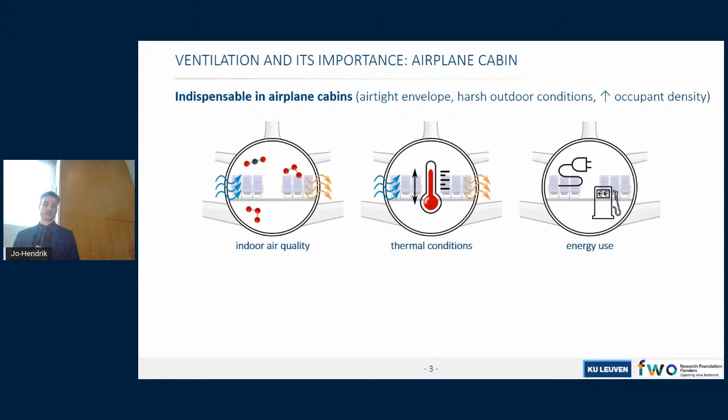To give an example, without ventilation, the comfort level of CO2 would be exceeded within minutes. And there is a case of disease transmission. It was in 1978, in which the airplane was on ground for several hours, and the ventilation system was not turned on. Just because there was one ill passenger, 72% of the other passengers were infected as well.

Another task of ventilation is to pressurize the cabin, because without ventilation, we weren't able to breathe in an airplane.

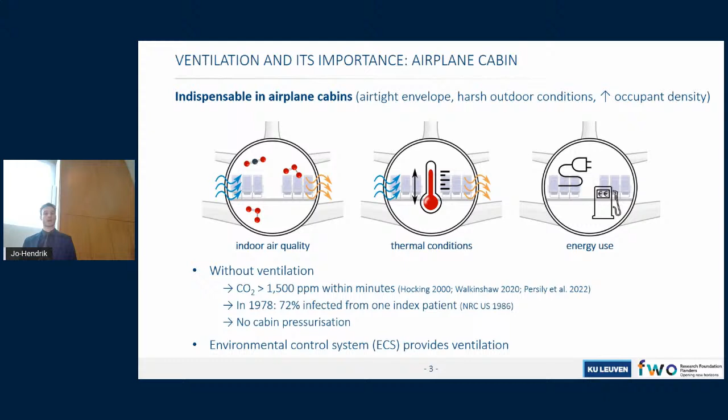The environmental control system, or the ECS, controls the supply air, which is the largest power consumer of the non-propulsive systems. Let's have a look how the ECS provides the ventilation air to the airplane cabin. I will be very brief here, so I will only explain very shortly the main working principle and only show a couple of subsystems of the ECS.

First there is the pneumatic system, which extracts the ventilation air. It's actually coming from the engines of the airplane cabin. There the air is already compressed. It's still at a high temperature, so eventually it will reach the air conditioning system, where air is cooled down to the temperature that is desired.

And then through a lot of subsystems, it will eventually reach the air distribution system. So then air is supplied, fresh ventilation air is supplied to the cabin.

The main ventilation method used in airplane cabins is called mixing ventilation. In mixing ventilation, fresh air is supplied above the passengers at a relatively high momentum in order to mix sufficiently with the cabin air. And as you can see, large recirculation cells are formed, which basically distribute the air throughout the cabin.

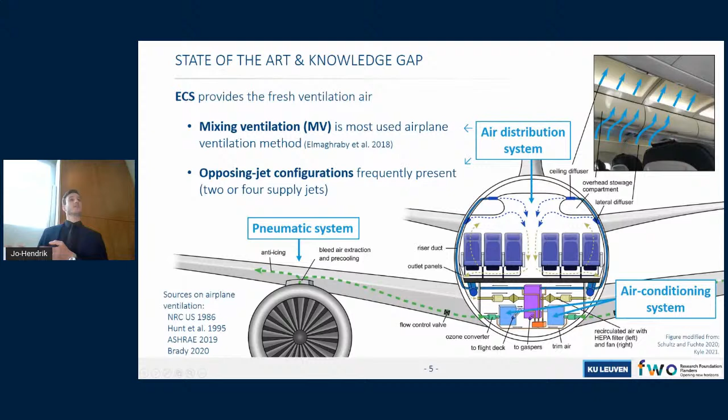An opposing jet configuration, as shown over here, with, for example, 2 ceiling jets or 2 lateral jets, is very often used for such a single aisle airplane cabin, and the cabin air is extracted at floor level.

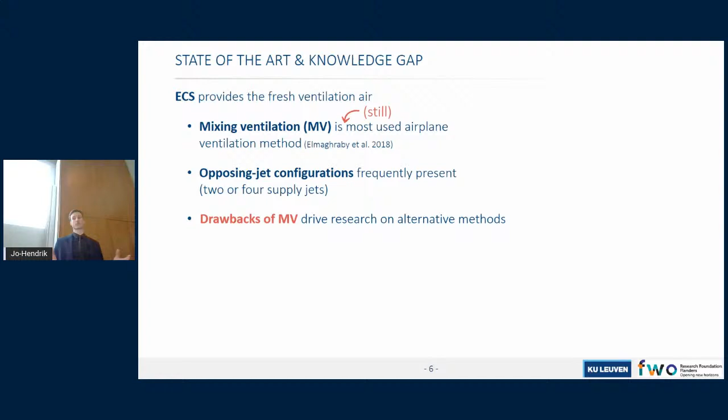There exist some drawbacks for this mixing ventilation method, which basically drives research on alternative methods. For example, displacement ventilation, as you see at the lower image. In displacement ventilation, air is supplied at a lower momentum below the seats, and it will eventually heat up, and it will displace the air towards the outlets that are located on the top. So it displaces the air, it doesn't mix.

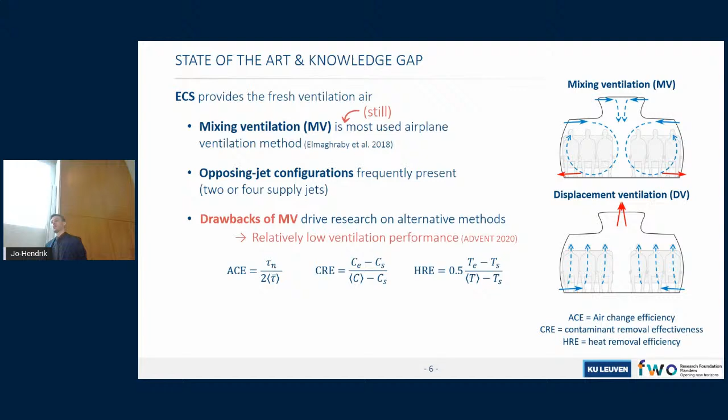So the mixing basically provides or gives a lower ventilation performance compared to, for example, displacement ventilation. And the ventilation performance can be expressed using these measures.

For example, on the left-hand side here, the air change efficiency, which basically measures the actual time needed to replace all the indoor air compared to the theoretical shortest possible time to replace all the indoor air. So it's a measure of how efficient the fresh supply air reaches every point in the cabin.

The contaminant removal effectiveness in the middle is concerned with the dilution of contaminants and the extraction of contaminants, and heat removal effectiveness on the right-hand side is the same as contaminant removal effectiveness, but concerns the heat instead of contaminants.

Other drawbacks are, for example, stagnant zones that can be present, for example in the center of the large recirculation cells. In stagnant zones, contaminants can build up, so this is undesired. Short circuiting could also occur, which means the fresh supply is directly going to the outlet flow.

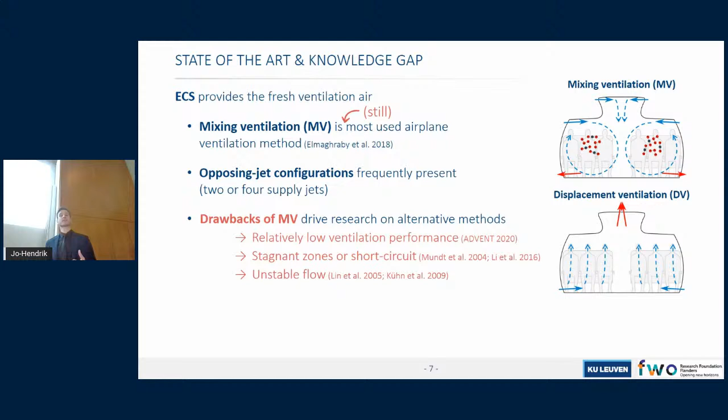Such a mixing ventilation flow could also show some unstable flow behavior, which is also undesired. So ideally, you would like to control the flow field as much as possible.

However, such alternative ventilation methods as displacement ventilation also have their deficiencies. For example, they experience difficulties with implementation related to high costs, interior design restrictions. And with deficiencies, I mean displacement ventilation cannot be used for heating the cabin, or it performs very bad for heating.

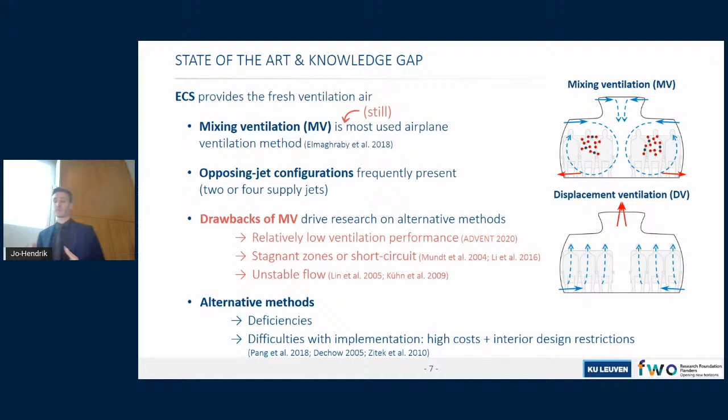Since mixing ventilation is still the most used airplane ventilation method, and airplane manufacturers still tend to use this method because of its robust design and easy implementation, the question of how to improve this mixing ventilation performance is still very relevant.

The mixing ventilation performance basically depends on the induced ventilation flow patterns and the underlying flow components, which are driven by the supply jets. By fundamental flow components, I mean the supply jets, their interaction into a merged jet, these recirculation cells, but also thermal buoyancy, the thermal buoyancy plumes rising above the passengers.

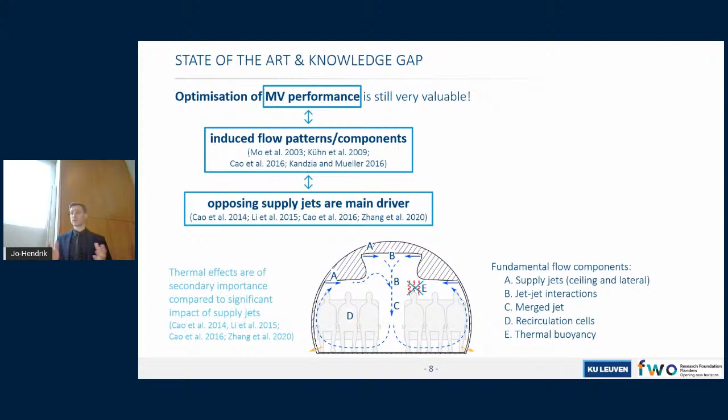I would like to mention that thermal buoyancy effects are considered to be of secondary importance given the primary influence of the supply jets, which really mainly drive the flow field. Therefore, in my thesis, I only focus on isothermal conditions. I did not consider thermal effects.

We would like to improve the mixing ventilation performance, and therefore there is a need to obtain a detailed investigation of all these flow patterns and the underlying flow components. And of course, we need to think about novel mixing ventilation concepts that may improve its performance. However, current literature fails to address these needs.

The fundamental flow components are only scarcely investigated in current literature. There exist some airplane cabin studies, for example the one shown here. These researchers used a cabin mock-up, a laboratory setup, and indeed investigated the airflow patterns as indicated, like the lateral supply jets, their interaction, and the recirculation cell.

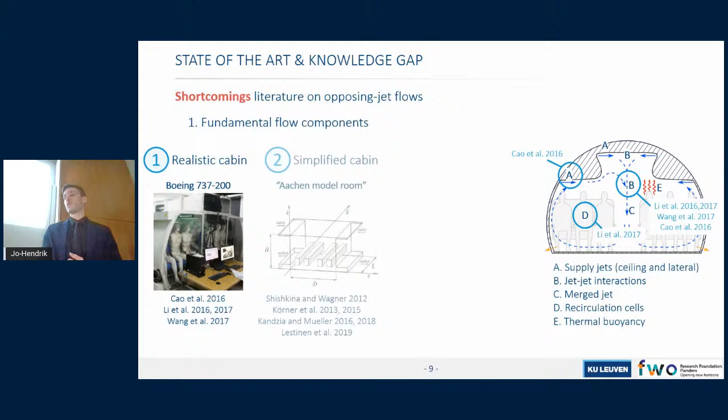However, since they used a realistic mock-up with a lot of details, these results could be case specific. So there might be a need to construct a more simplified model, such as the Aachen model shown here, where you have two opposing wall jets at the top.

These researchers did not investigate in detail the underlying flow patterns. They mainly gave a description of the overall velocity field and temperature field, without going into detail on the fundamental flow component characteristics. Such a detailed characterization has been performed in even more fundamental studies.

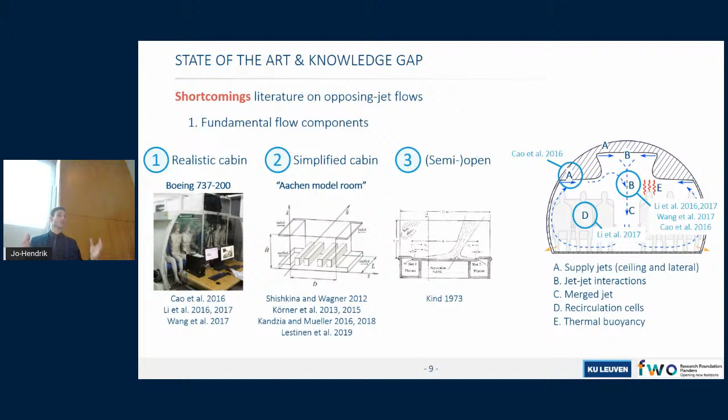However, these studies use an open environment, while an airplane cabin is definitely an enclosed environment, so you have return flows that can have a very large impact. So basically, this defines my first objective. We designed a generic experimental setup consisting of a simplified cabin model in order to study such opposing jet configurations, but also the underlying flow components.

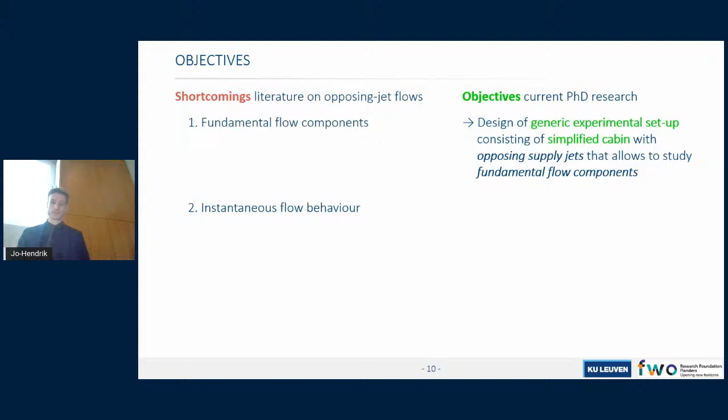The literature also mainly describes the mean flow behavior. The instantaneous flow behavior is rarely described. So this defines my second objective of the thesis: I analyzed both the mean and the instantaneous flow behavior of such an opposing jet flow.

Mainly steady simulations, so time-independent simulations, have been used in the literature. Therefore, I performed steady but also transient CFD simulations. Novel mixing ventilation concepts are missing because researchers tend to investigate alternative ventilation methods instead. This is why I investigated time periodic ventilation, as I will explain later, as a novel mixing ventilation concept.

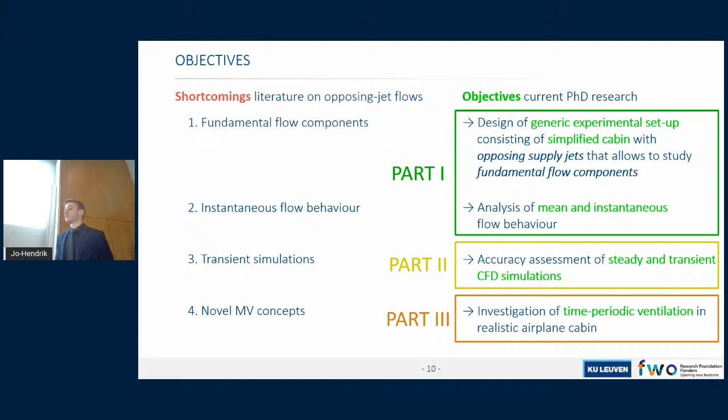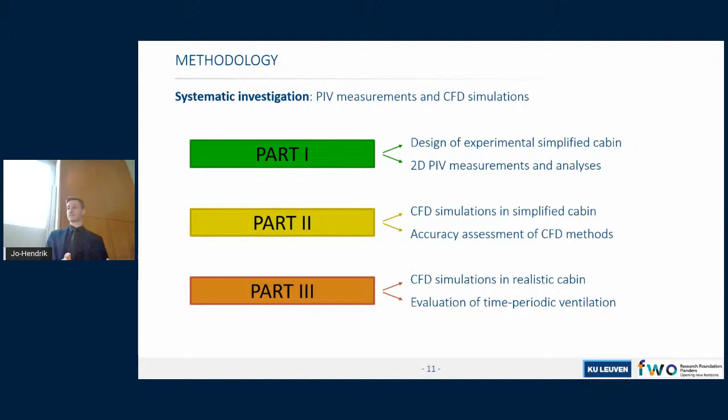The three parts of the thesis consider each of these objectives. Here you see an overview of the thesis. I performed a systematic investigation, consisting of both measurements and CFD simulations. Let's focus on part one.

Its width is 30 centimeters, the height is 20 centimeters, but the width to height ratio is the same as used in airplane cabins. It's water-filled because it's reduced scale. As you probably also noticed, it's an empty enclosure, so no seats and no passengers are incorporated, so it's isothermal as mentioned.

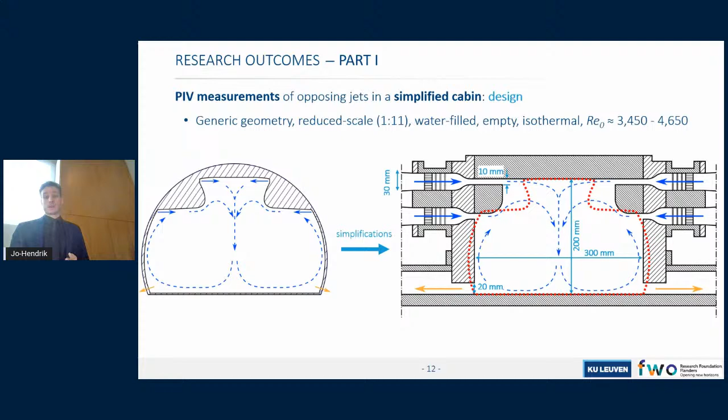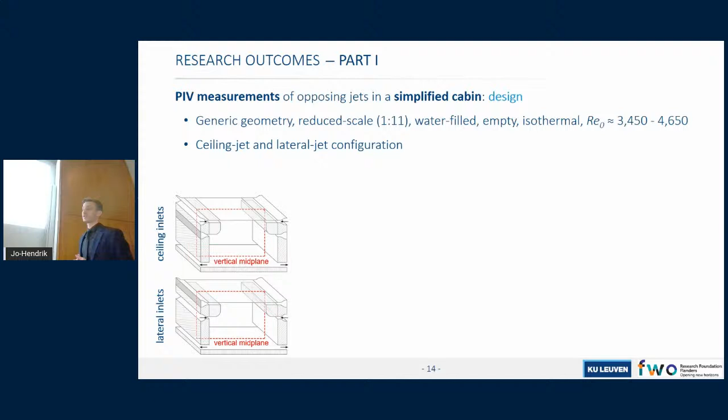I investigated two opposing jet configurations: a ceiling jet configuration with the ceiling inlets open, and a lateral jet configuration with only the lateral inlets open.

Particle image velocimetry, or PIV, measurements have been applied. Important to mention is that the laser light illuminates the vertical midplane. This was the measurement plane, so I measured the flow field in the vertical midplane of this setup.

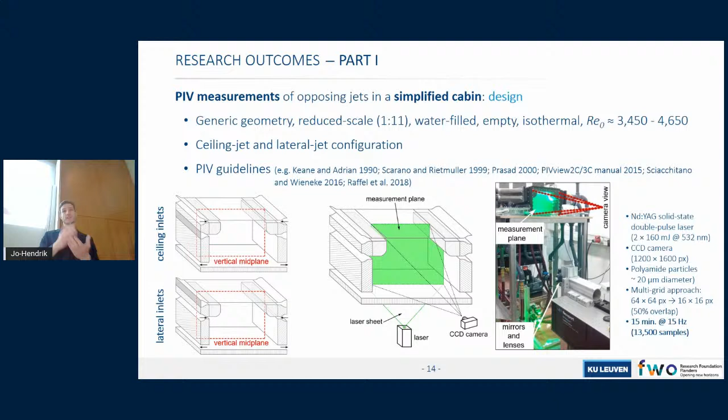Each measurement was taken for 15 minutes at a sampling frequency of 15 Hertz, so I collected 13,500 instantaneous snapshots of the flow field. In total, I performed 6 measurements, 3 in each opposing jet configuration.

I would like to mention that although I tried to carefully match the inlet conditions of the opposing jets, there's still a slight deviation, for example in the Reynolds number or in the turbulence intensities. You should keep this in mind for a moment.

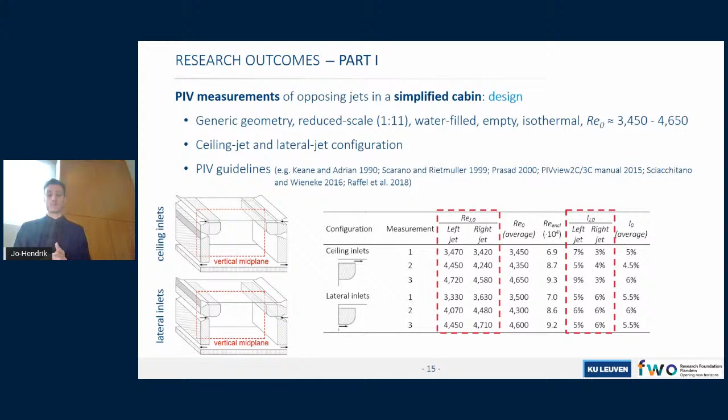Now let's show the results in both configurations. First, the configuration with opposing ceiling jets. I will show the instantaneous flow field followed by the mean flow. So this is how the flow field looks like.

You can clearly see both ceiling jets coming from the ceiling inlets. They interact around the vertical center line of the enclosure, showing a transient interaction zone shifting from left to right across this vertical center line. This interaction zone drives the merged jet, which appears to flap from left to right.

Some specific observations for one of the 3 measurements: as opposed to the other 2 measurements, this one showed stronger deviations of the merged jet location from the vertical center line. This is shown in this figure.

On the vertical axis, you see the location of the merged jet as a function of time. The green curve, which belongs to the measurement I'm talking about, shows some deviating positions, meaning that the merged jet is located for 20 up to 60 seconds closer to one of the 2 inlets. At such instances, the flow field can even become unstable, as you can see here.

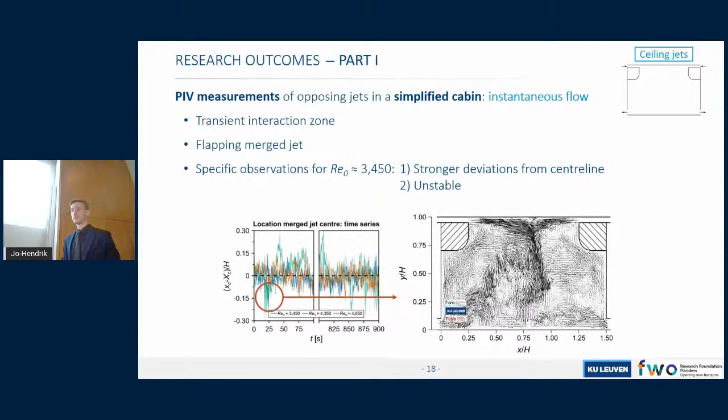This clearly shows some unstable behavior, which could be due to the fact that in this measurement the inlet conditions were a bit more balanced. Compared to the other measurements, there was a larger difference in supply velocities, for example, which could mean that one of these jets is suppressing the opposing jet more, giving a more stable configuration.

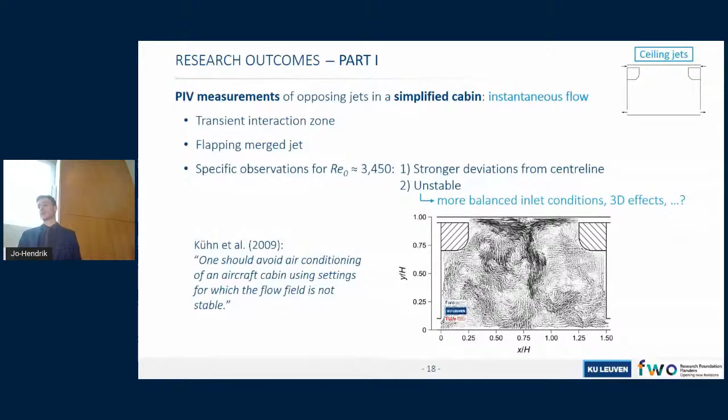Also, 3D effects could be present, but this I didn't test, because I performed 2D PIV measurements in one plane only. As already stated in the literature, one should avoid air conditioning of an aircraft cabin using settings for which the flow field is not stable.

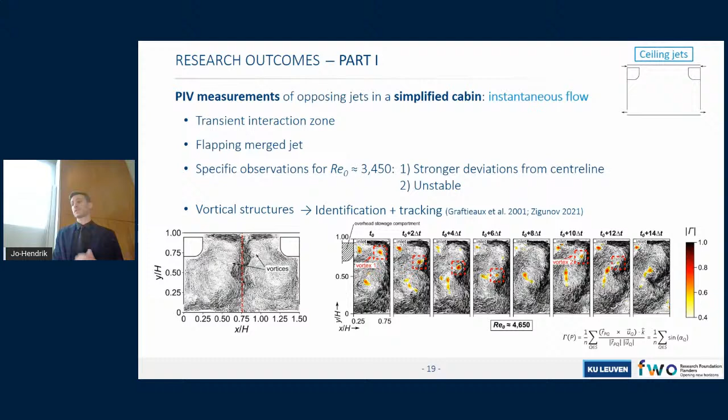Then by inspection of the flow field, I observed a lot of vortices, so I tried to visualize and track them over time. What's important to mention is that such vortices, or in Dutch 'wervels', can be advected along with the flow, along the merged jet. You can clearly see that high momentum fluid from within the core of the merged jet is transported to the sides, so such vortices really contribute to the mixing in the enclosure.

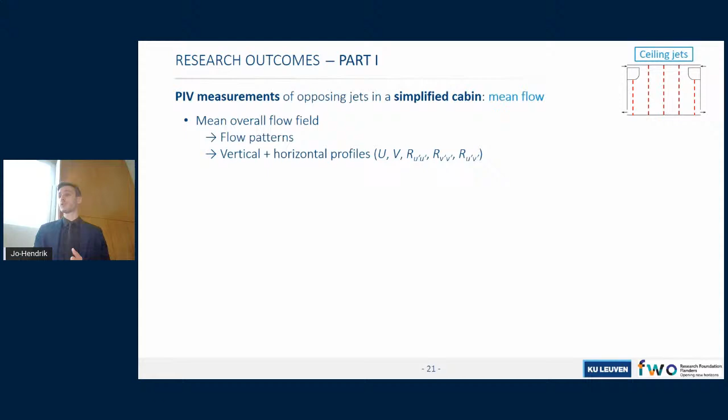Then I inspected vertical profiles and horizontal profiles, which I will briefly show: the vertical and horizontal profiles of the velocity components, and also of the Reynolds normal stresses and Reynolds shear stresses. These Reynolds stresses represent the velocity fluctuations, which are related to turbulence levels, if you want.

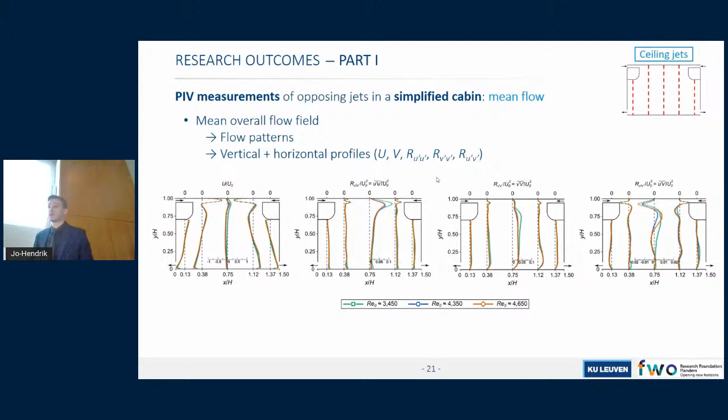We analyzed the vertical profiles as mentioned, so we could clearly see from this image, which represents the vertical velocity over the height, it clearly shows the development of the merged jet, which also becomes wider because of the mixing at its sides due to these vortices I've shown.

In the interaction zone, high turbulence levels are present, indicating that this is really like a transient, it's really shifting back and forth along the center line. Also, high turbulence levels are present along the sides of the merged jet.

Besides the overall flow field, I also investigated the individual flow components. So for each flow component, I derived several characteristics. What I would like to show here is that indeed in mixing ventilation, stagnation zones can be present. And in case contaminants would be present inside my experimental setup, they might build up in such areas, which is of course unwanted.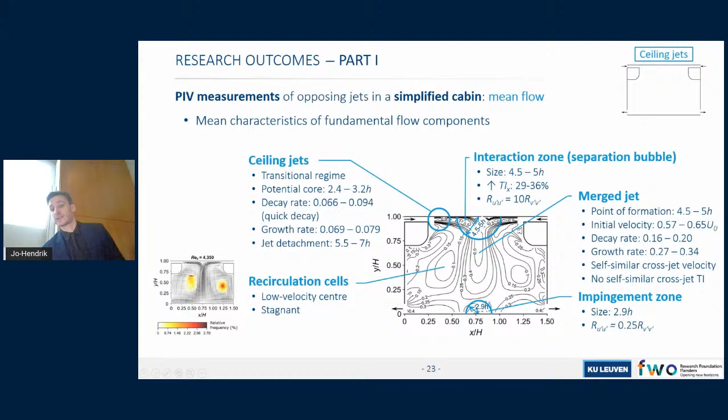Let's have a brief look at the lateral inlet configuration. I will only give a brief outline of the results here. I showed the results of the ceiling inlets in more detail because I will use these measurement results in part 2 later. So the instantaneous flow looks like this.

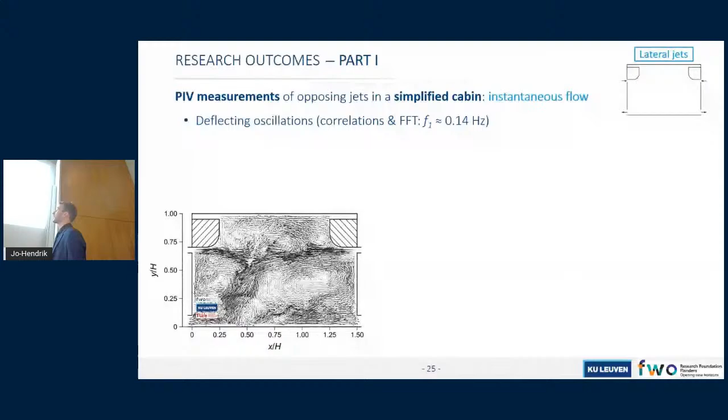We can see deflecting oscillations with a specific frequency, which is also similar to airplane cabins. Besides the deflecting oscillations, some horizontal oscillations with higher frequency were observed. This is basically the situation in between these deflecting oscillations when both jets really try to displace each other.

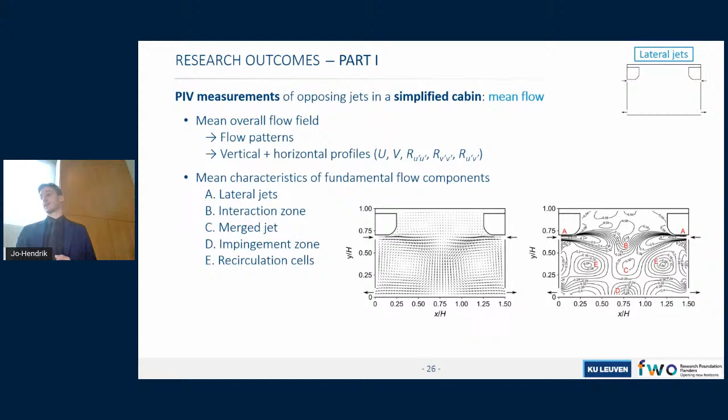Vortical structures were again investigated. Then some results of the mean flow. So again, I investigated the overall flow field in terms of the flow patterns. Vertical and horizontal profiles were observed. And again, a characterization of each of these flow components was made.

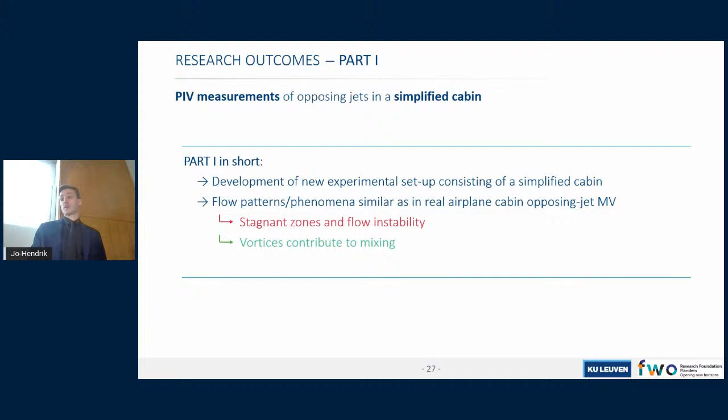So part 1, in short, I developed a new experimental setup that consists of a simplified cabin mockup. And this cabin mockup really shows flow patterns or phenomena similar to opposing jet mixing ventilation. It showed indeed some stagnant zones and flow instabilities, but also vortices that can contribute to the mixing.

This brings me to the second part of my thesis, in which I performed CFD simulations in this simplified cabin, and I tried to assess the accuracy of several CFD methods using the measurements presented in part 1.

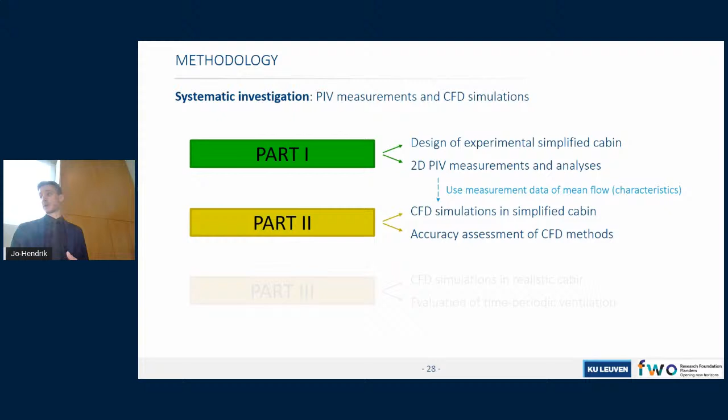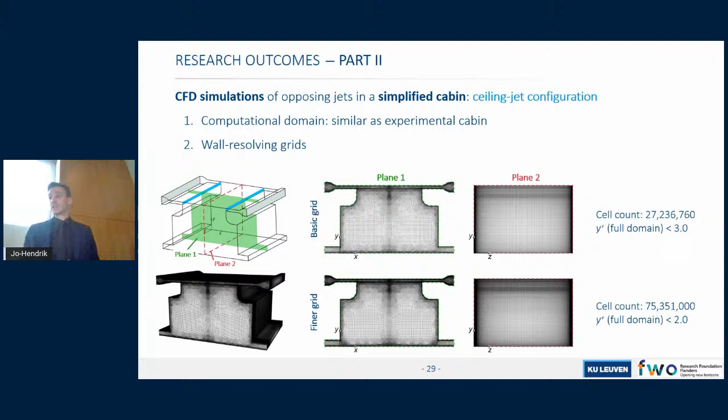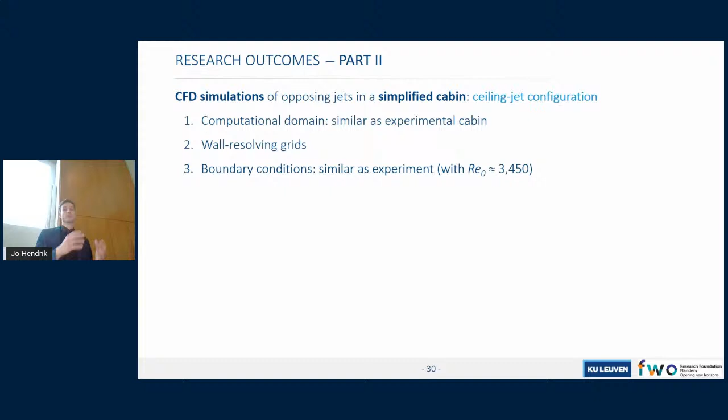The boundary conditions are taken equal to those in the experiment. However, I should mention that because in the experiment the inlet conditions differed a bit between the two jets, I took the average value, and this average value has been used for the inlet conditions of both jets in the simulations. We choose the correct computational settings, then the turbulence modeling.

So I tested two different turbulence models, RANS and LES, which I will show you on the next slide. I use this drawing of Leonardo da Vinci, in which you can see a water stream flowing into a pool, creating a turbulent flow consisting of many different vortices, ranging from larger scale vortices all the way down to smaller scale vortices.

In RANS, none of these vortices, or none of their energy, the turbulent kinetic energy as we call it, is actually resolved. Only the mean flow is resolved, and all the turbulent kinetic energy is modeled. While in LES, which is also called the scale resolving method, a large part of the turbulent kinetic energy spectrum is resolved, and only the smaller scale eddies are modeled.

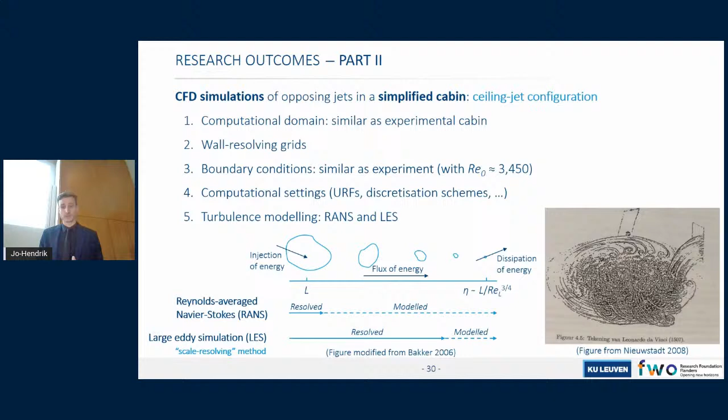To give you an idea about how such a flow field looks, in RANS you can see this is the mean flow behavior. In LES, this is an instant of an LES simulation. So LES is time-dependent, providing a time-dependent flow field. You can also clearly see there are more details inside the cabin. So in order to compare the LES simulations with RANS, we need to time average the results.

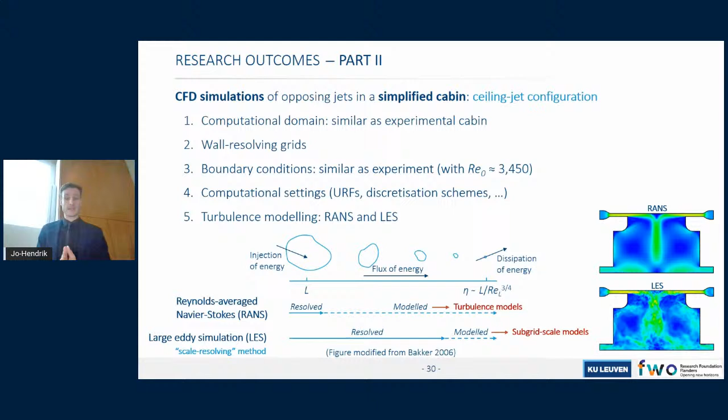The modeling part is controlled by either turbulence models in RANS or by subgrid scale models in LES. I tested 3 different RANS models and 2 LES models. For the RANS models, I tested 2 K-epsilon models, the RNG and the low Reynolds number model, and 1 K-omega model, the SST K-omega model. The LES subgrid scale models are the WALE and the dynamic kinetic energy model. So I performed 5 simulations in total.

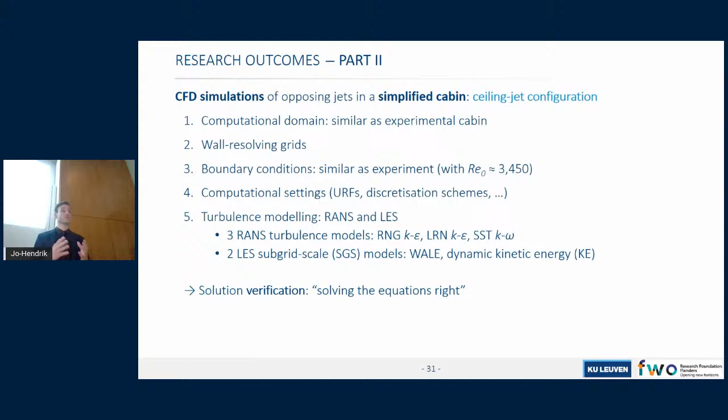The first thing we need to do is to verify the solution, which basically means verifying whether the grid resolution is sufficient. Can we use the basic grid resolution, or should we use the finer grid resolution? From these analyses, I could conclude that the basic grid resolution was sufficient, so we can use the results obtained on the basic grid to validate the solution.

This means that we will now validate which method, which simulation, shows the most accurate flow predictions comparable to the measured flow.

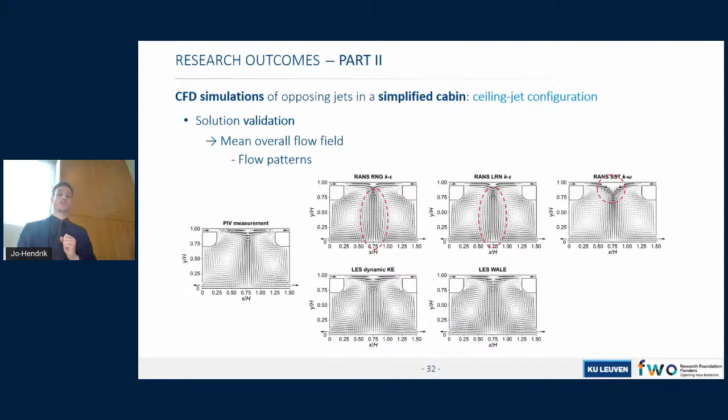But there appear some specific differences. For example, the K epsilon models show some higher velocities in the core of the merged jet. And the SST K omega model shows the size of the interaction zone, which is also larger compared to the measurement, which is less accurate.

Then by comparing the vertical profiles and applying validation metrics, which are basically some mathematical formulas that give you a quantitative number showing how good the agreement is between measurements and simulations.

And we could conclude that both RANS simulations actually show very similar performance. The velocity predictions are reasonable, but the Reynolds stress predictions, or the turbulence levels, are poorly represented. The SST K omega model shows to be better.

This is basically because this model showed oscillatory convergence. So with the K epsilon models, a steady flow solution was obtained, whereas with the SST K omega model, you could clearly see that it was alternating between steady state solutions, which are basically the flow states of the underlying transient opposing jet flow.

Same analysis we did for LES. We could see that both subgrid scale models show similar velocity predictions, but they show much better Reynolds stress predictions compared to RANS.

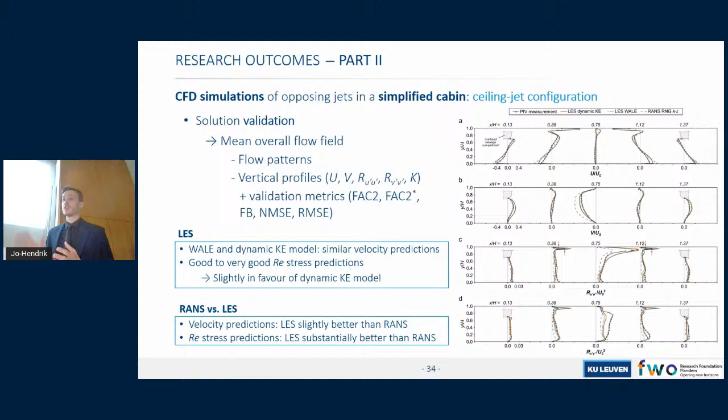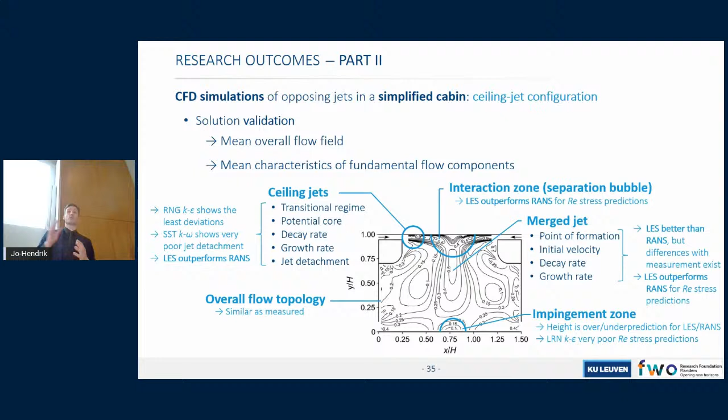So in general, LES performed better than RANS for the overall flow field. Let's have a look at these flow components, with in light blue the observations derived from the simulations. In conclusion, again, LES for most of these flow components performed better than RANS.

So part two, in short: the RANS K epsilon models are incapable of correctly capturing the mean behavior of the highly unsteady opposing jet flow.

As for the SST K omega model, because of the oscillatory convergence, it covered part of the unsteadiness, whereas LES is needed for accurate representation of opposing jet flows because of its unsteady and scale-resolving properties. However, it should be mentioned that LES also requires much higher simulation times, even up to a factor of 41 compared to RANS. So this is important to consider.

And this brings me to part three, the last part of the thesis, in which I performed CFD simulations in a realistic airplane cabin.

Because of the principle of subconfiguration, I used the information from part two, which showed that LES showed the best performance. Therefore, I can use LES simulations in a real airplane cabin as well, and I will evaluate the concept of time periodic ventilation.

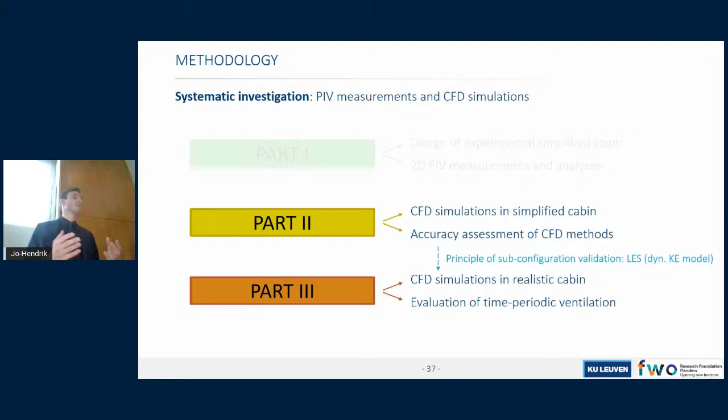Again, first the computational domain is constructed. So it's a model of a single aisle cabin, similar to an Airbus A320, as shown on the right-hand side. I also constructed a realistic model of the passengers. Wall resolving grids are again constructed.

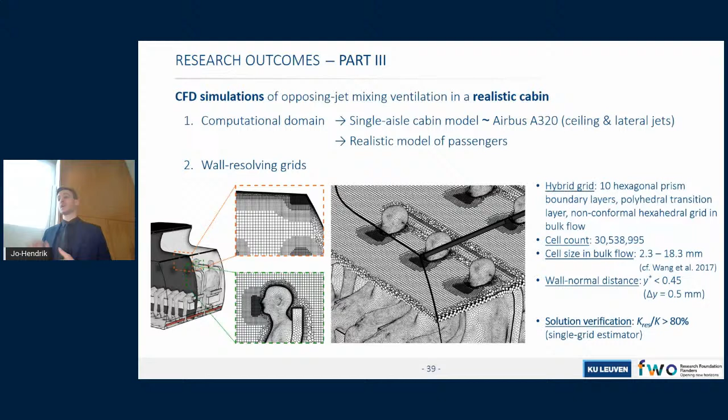The solution was verified, so the grid resolution you see in these images was sufficient. Computational settings are chosen, and for the turbulence modeling, LES is used, based on the results of part two.

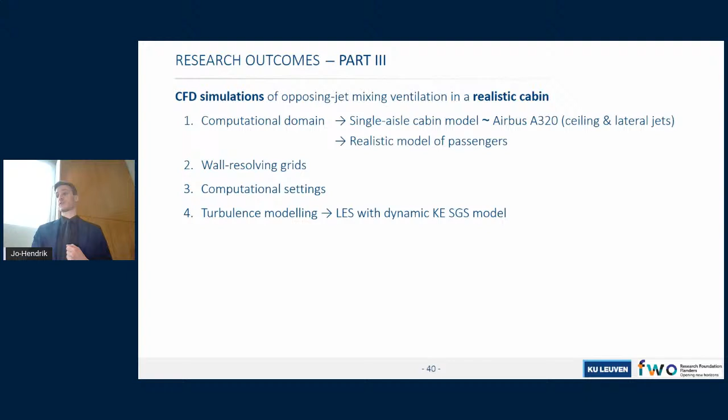Some boundary conditions: contaminants are produced inside the cabin via the passengers, who are all breathing out. It's modeled as a constant flow rate and as a passive gas.

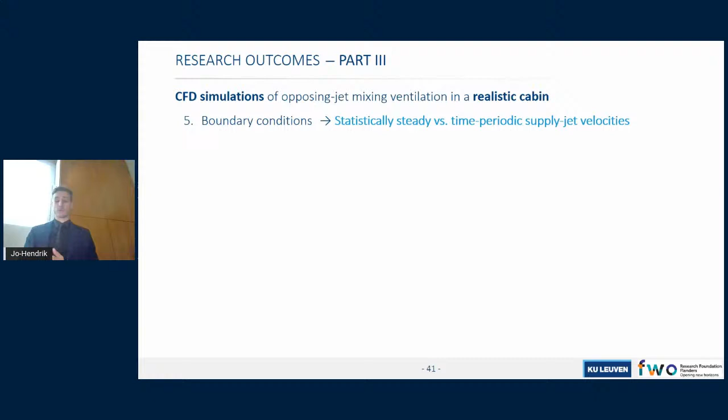And at the inlet, I evaluated statistically steady supply velocities, and I will compare it to time periodic supply velocities. So statistically steady ventilation basically means that the supply velocity is constant over time. This is how current ventilation works.

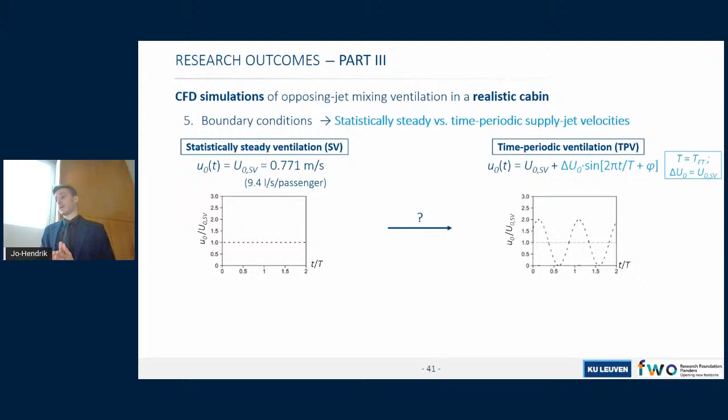And we try to investigate what happens if we add a sinusoidal contribution to the inlet velocity. So what happens if the inlet velocity is varied over time according to a sine function, with a specific period approximately equal to 10 seconds, so a relatively rapid variation. The amplitude of the sine signal was taken maximum in my study.

So what is the effect of time periodic ventilation on the opposing jet cabin mixing ventilation efficiency? And note that on purpose I used the word mixing ventilation efficiency.

In the beginning, I was talking about mixing ventilation performance, for which we could use three parameters. Now with mixing ventilation efficiency, I only consider the first two parameters, because I performed isothermal simulations and could not obtain any results for the heat removal effectiveness, since no thermal effects were present.

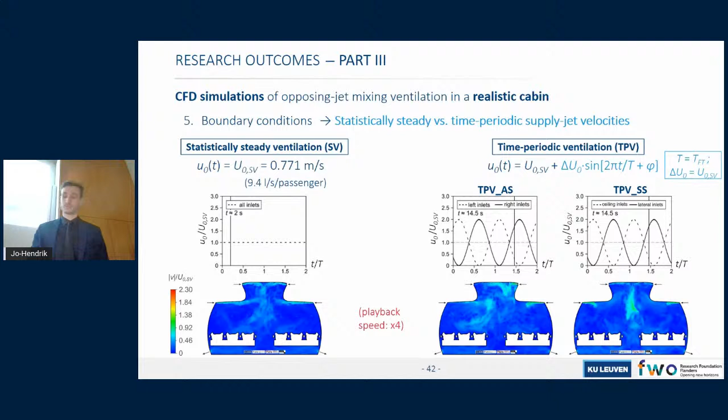Important to mention is that in the time periodic ventilation cases, the total amount of supply air remained unchanged compared to the steady ventilation case.

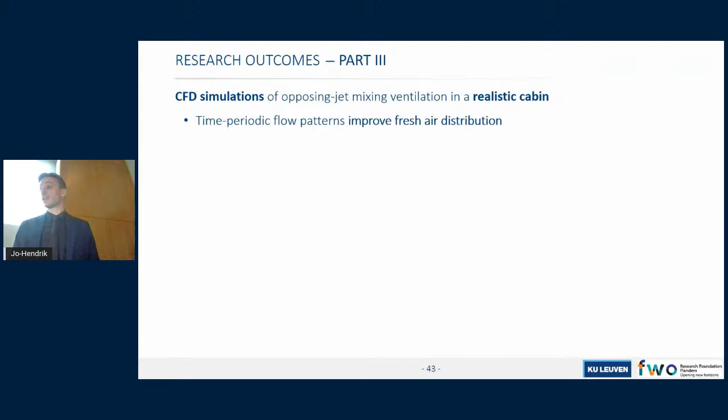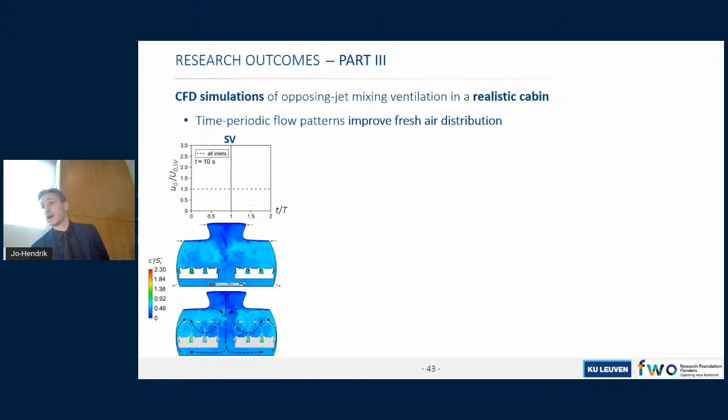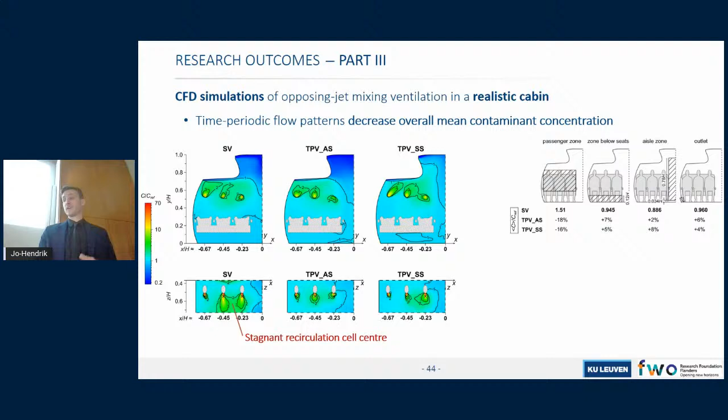If you look at the separate zones, we can see that in the passenger zone the contaminants decrease, but in the surrounding zones and at the outlet contaminant concentrations increase, which basically means contaminants are transported from the passenger zone towards the surrounding areas. Calculation of the contaminant removal effectiveness showed that it can be improved compared to steady ventilation.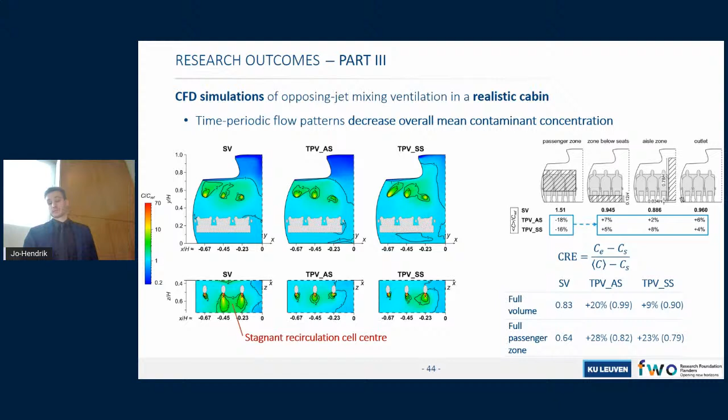Then the overall mean velocity level: you can see that under time periodic ventilation, the velocity level increases, which is undesired if you look at thermal comfort.

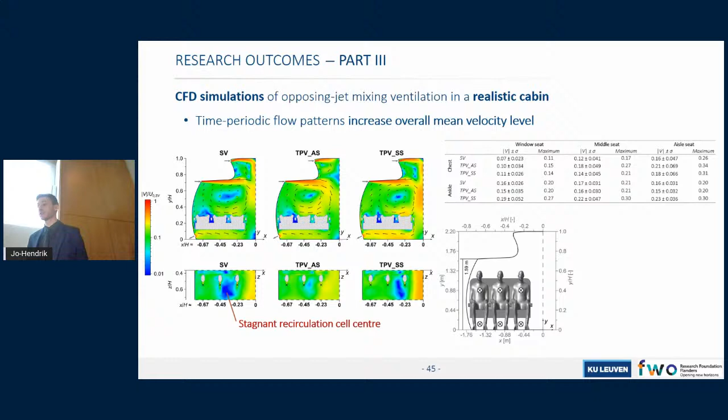Therefore I did further analysis. At the monitoring points at chest level and ankle level, I obtained the maximum velocity and compared them to the acceptable conditions mentioned by ASHRAE. For seated passengers and crew, velocity levels should be lower than 0.36 meters per second, which is fulfilled. For more draft-sensitive body parts like the ankles, it's recommended to keep velocity levels below 0.2 meters per second, which is fulfilled except for the symmetric supply, as you can see here.

In short, time periodic ventilation can improve ventilation efficiency without changing the supply flow rate, which shows potential for energy savings—we could reduce supply flow rates without losing indoor air quality. However, these assumptions still require a lot of future work. More information can be found in this paper.

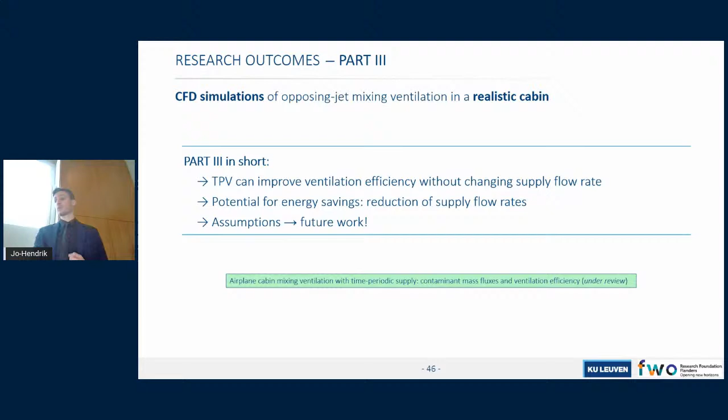This brings me to the conclusions of my presentation.

In part one, I constructed a new experimental simplified cabin mockup in which isothermal opposing ceiling and lateral jets could be studied. I observed qualitative agreement between the flow field in the generic setup and the flow field in real airplane cabins, and I did some quantitative analysis, obtaining information on the velocity and turbulence levels of the overall flow field and of the underlying flow components.

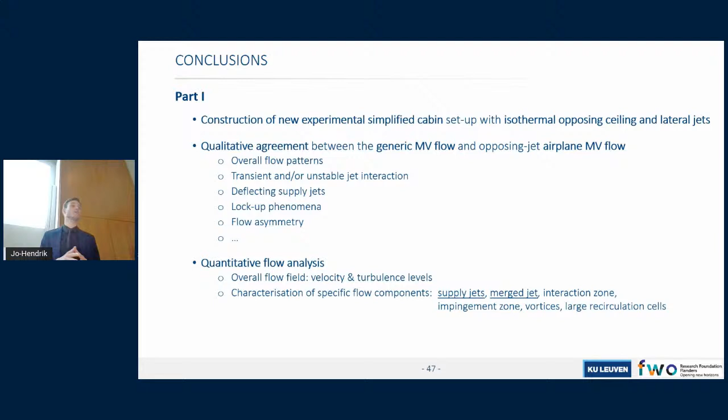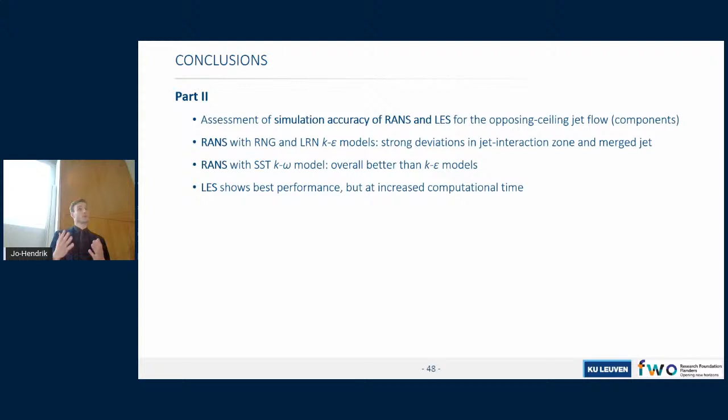In part 2, I assessed the accuracy of both RANS and LES simulations. RANS with the K epsilon model showed strong deviations in the jet interaction zone and along the merged jet, whereas the SST K-omega model showed improved performance because of the oscillatory convergence, and LES showed the best performance. However, computational times are strongly increased.

In the last part, time periodic ventilation was assessed, and it showed improved mixing ventilation efficiency. The air change efficiency and the contaminant removal effectiveness were improved. This is basically because these time periodic flow patterns cause a more efficient delivery of fresh air throughout the cabin. They dilute the contaminant concentrations more. However, we still need to do future work.

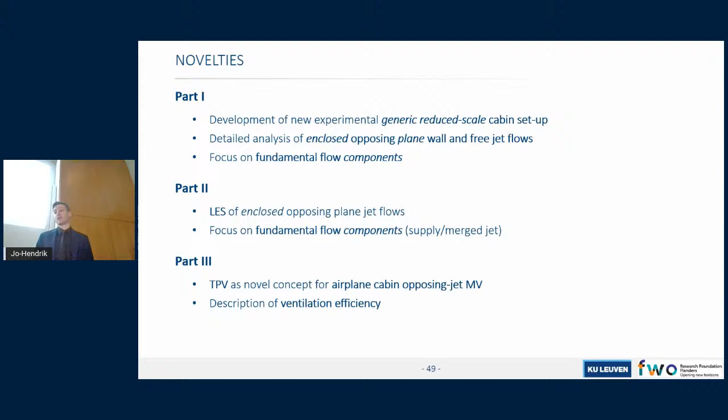My last slide to conclude my presentation covers the novelties: the generic reduced scale setup that was constructed, the analysis of enclosed opposing wall and free jet flows, not only the overall inspection of the overall flow field, but also the underlying flow components. LES has been used, a scale resolving transient modeling approach, again focused on the fundamental flow components. Time periodic ventilation was assessed as a novel mixing ventilation concept for airplane cabin mixing ventilation, and we described the ventilation efficiency. Thank you very much.

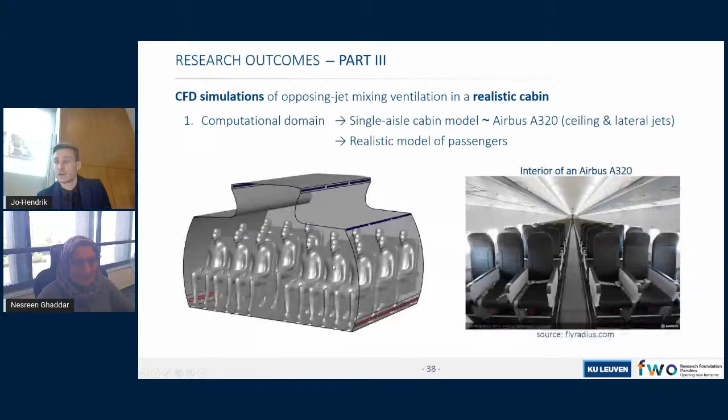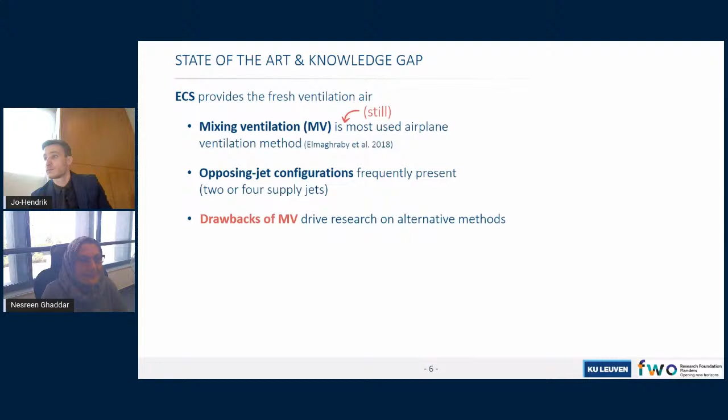If you go to slide 6, when you were considering mixed ventilation and the deficiencies in mixed ventilation, it had two separate zones in the same row. In these rows, you had one group with recirculating flow and another group with recirculating flow, with the dilution not sufficient to make the air quality acceptable, if this is my understanding. But in that system, if you have an infection source in zone 1, the possibility of this moving to the second zone might actually be lower than if you go, let's say, to slide 18, when you were showing the merged jet with the supply, or any of the slides that show this effect. So if you have an infection source in one zone, could it very easily be entrained and get to the other zone? Am I right in this or not? What is your answer to this? And would that actually compromise the improved dilution of contaminants in either one?

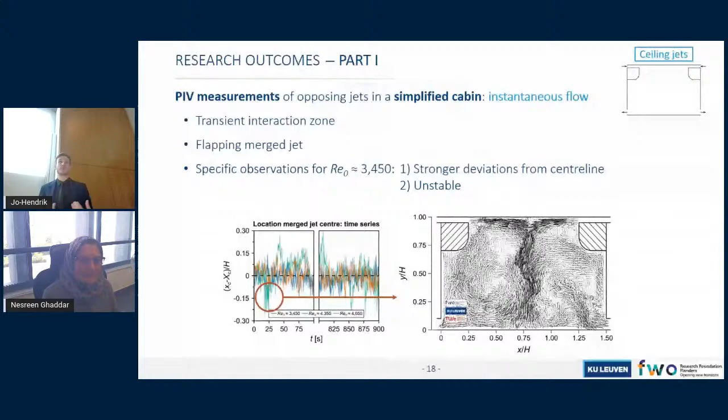Yes, indeed. This is also a known deficiency of mixing ventilation. It's called cross-contamination, when contaminants actually cross the barrier of the merged jet towards the other side. Basically, what is mentioned in the literature is that you would like to keep the contaminants within one row, so you would like to reduce the longitudinal flow towards the rows behind or in front of you. So this indeed is an issue. Then the question may be, in case we use time periodic ventilation, will this be sufficient? Because using time periodic ventilation may even improve or may even stimulate the cross-contamination. But in case time periodic ventilation reduces these concentrations more, I wonder if this really is bad. Of course you don't want it, but I think that with a main air distribution system such as mixing ventilation, you cannot fully keep the contaminants within one row only. Therefore, you might have to go to personal ventilation units, but I don't know if this is realistic to implement in an airplane cabin. However, what I also noticed is that when you use time periodic ventilation with this system, it performed much better in terms of localizing the contaminants, if I'm not wrong.

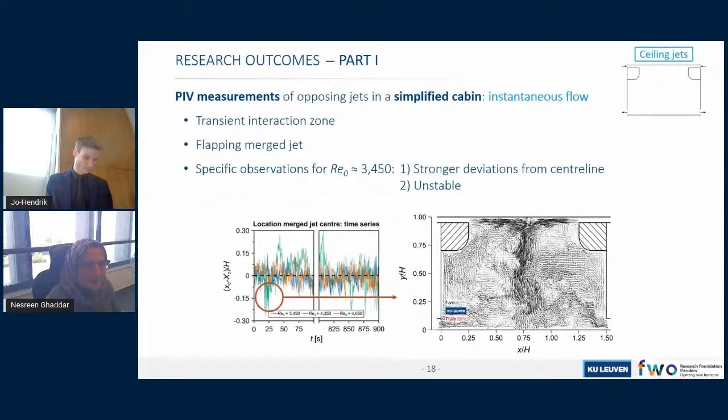So in a sense, if you do more work on that, you might find better parameters, the optimal parameters for best operation of this. But you mentioned something about when you said that in literature, you try to keep the contaminants within one row. Yes, and again, there is another catch here, you're talking about the two-dimensional model.

But what happens if you have any disturbance in the aisle, with someone walking from back to front or front to back, or when food is being distributed, that creates additional disturbance that may enhance the entrainment and forward moving of contaminants to front or back rows, that is in the axial direction. So do you think the mixed ventilation model, the old one, would offer more protection from that axial movement than if you have the jet interaction, the jet merging at the center of the aisle? It is just another thing to consider.

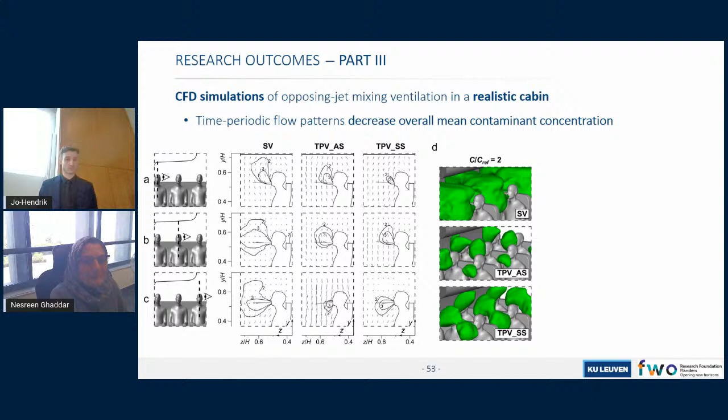Okay, so Jo-Hendrik, first of all, thank you for the very nice presentation. I really enjoyed it. On one of your slides, you mentioned that there was a study saying that you should avoid transient behavior of flows, instability. But I was wondering, why not go to the laminar regime, for instance? What do you think about that? Is it possible in an airplane cabin, you think?

No idea. I think with an airplane cabin, it might not be realistic because of all the movements of the passengers. I think this will be a transitional or a turbulent flow, indeed. It might be that with personal ventilation, you could have some laminar flow behavior, so then every passenger has its own micro environment. That could be, but with the main ventilation system, I don't think it can be realized.

And why not go to the fully turbulent regime? Probably it's fully turbulent inside the cabin. The supply jets, they are in the transitional regime, but the merged jet will for sure be turbulent. Yeah, but if you also make the injection jets turbulent, would that help? Yes, it might improve the mixing, but then you're also restricted to noise issues, because for the turbulent regime, you will need higher supply velocities.

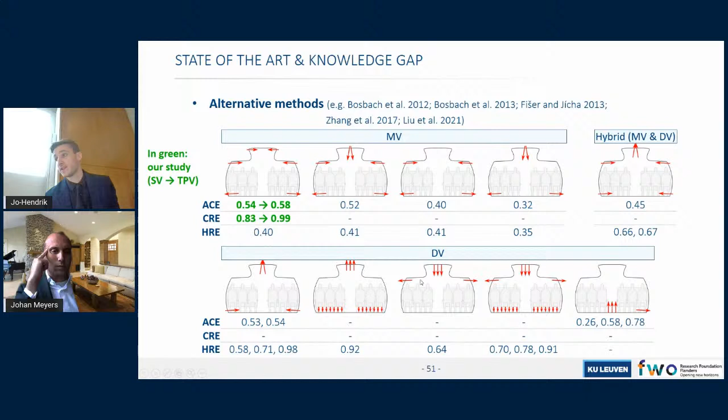In the second image, you can see that air is tested to come from below the seats, for example, or even from the ceiling with a low velocity. It flows down, heats up at the floor, and then rises again. So different kinds of displacement ventilation concepts have already been tested.

I know that an airplane manufacturer already did some research on how to implement displacement ventilation, studies from 2012. They mentioned that they will see what happens with such research, so I have the feeling it's not on point yet.

Given the examples you showed, is there no example that really uses this overhead ventilation system, or is there the philosophy that every passenger should also have its own controllable ventilation device? What do you mean, that these examples don't include personal ventilation nozzles? Exactly, right, as far as I can see at least.

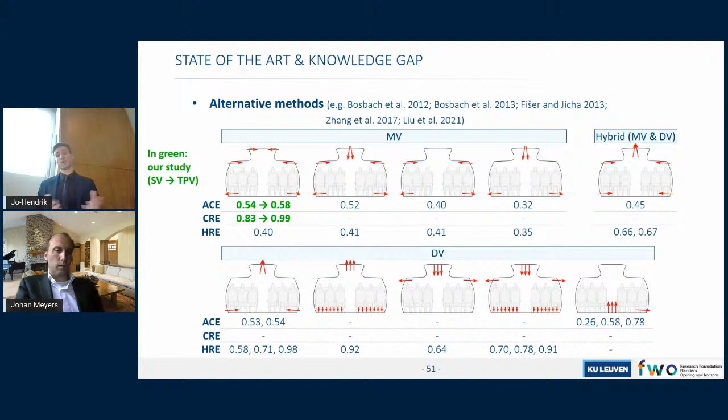Yes, indeed. Most of the studies don't consider these nozzles open. I know there are some more fundamental studies which focus on the interaction point between the nozzle, the main air distribution system, and the thermal plume. But if you look at airplane cabin ventilation studies in general, in most cases these nozzles are not considered.

So in your work, you provided a thorough validation of RANS and LES versus experiments, and one of the results, similar to others in other tables, is in table 4.3, I think on page 126. You give FAC2 and RMSE for different predictions of velocity and Reynolds stress, etc. But I was wondering, what does this mean? What can you do with this if you talk to a manufacturer?

You mean, in what way can you explain to a manufacturer that you can or cannot do something given this table? And which table exactly, which page? Because I cannot find it. 4.3, page 126.

Yes, indeed. So basically, these measures compare either point-wise, where every data point obtained in the simulations is compared with the corresponding data point from the measurements, or they could first calculate the mean variable and then do a comparison of the mean variables.